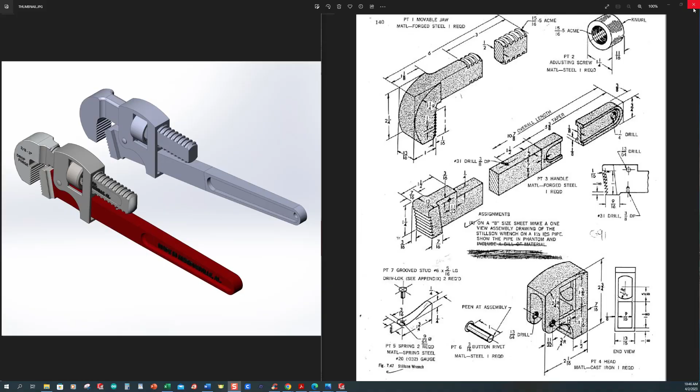So let's go ahead and get started with this, and make sure that we're in SolidWorks and in inch settings. I've created a separate little view here where we can see our dimensions pretty easily.

There's a few things we want to keep track of with this. We're looking at everything coming off of this front face, so we have an inch back to where the teeth are going to start. I'm not too concerned with the 1 1/8 right here as of yet. We've got 6 inches overall, 2 1/4 in the height, and 1 1/4 on the radius here.

And if you notice, this drawing is using fractional tolerances. So this is probably a 1950s or 60s model drawing that we've got out there. There may be some things done a little differently than what we'd do today, but we're going to work with it as best we can.

So let's make sure we've got SolidWorks open, and we're going to go ahead and create a new part. We'll verify that we're in inches—I look down here at the bottom right, and I am in inches. I want to start with an extruded boss base, and I want to start on the front plane.

So I'm going to draw a relatively simple line here—one here, down, over, down, and over. Now we're going to need an arc out here, so let's come up and grab a 3-point arc. Select the 3-point arc here and here, and something along those lines.

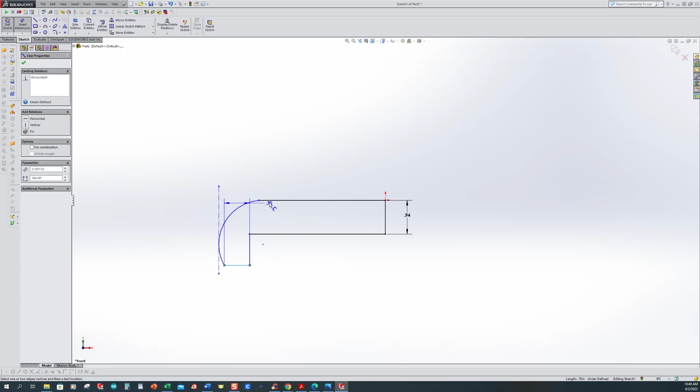So from here to here was 2.25. Now my radius, I should have added a relation there, so let's add a relation. We want to pick this arc and that line and that arc. Let's make those two tangent.

So now let's go ahead and continue with our dimensions from here to here. We want that to be 1. From here up, oh, I already have that one. And then we need an arc here, and that was 1.25.

And now we are missing something. Oh, the overall length. So smart dimension. So I want to pick from here to this line, and we want it to be 6. So now we're fully defined.

Now how wide was this part? So we want to come back to our drawing. It looks as if we are 13/16, or 0.8125. So let the computer do the math.

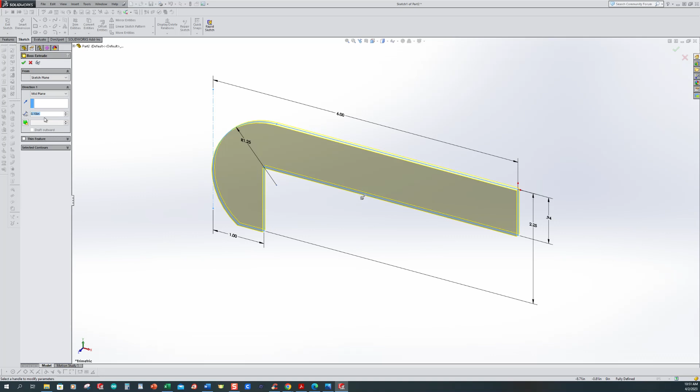So we should still be in the features of extruded boss base. If not, go ahead and select extruded boss base. Now this is where I want to use the mid-plane feature just to keep everything symmetric. Now this was going to be 13 divided by 16 is 0.8125, and go ahead and accept it.

Alright, so there's the beginnings of our jaw. Alright, so the next thing that I want to do, we can cut some teeth in it, and it looks like it's got a radius here, but I don't really know what that radius is.

We'll just add something in that looks visually representative, and we can also cut these out on the top. Let's go ahead and cut the top out, and we'll cut our threads in first. Alright, so let's select extrude cut, and I'm going to pick this very top surface. I'm going to pick a line from here down and over, and I don't know how wide this thing was.

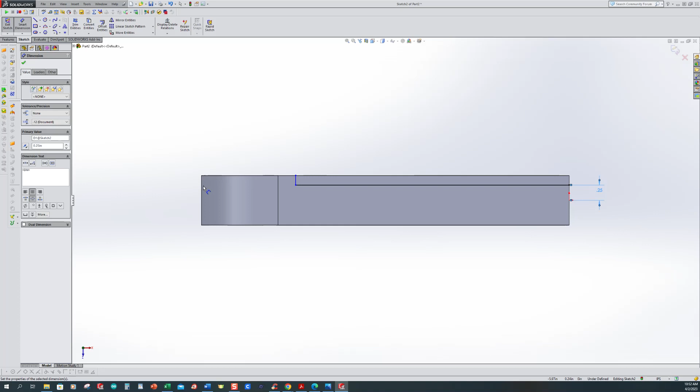It looks like this is a sectioned off view, so it says that we're 1/2 of an inch in width. So remember, we made our part symmetric, so we're going to come select a smart dimension, pick our origin, pick this line, and that's going to be 0.25, because 0.25 times 2 is going to be 1/2. There was also a dimension from here to here, and that was 1.125. Yep, 1 1/8, so 1.125.

And now we're fully defined. So select features. I wasn't sure if I selected extruded cut or not before. I want to say I want it to go through all, and I want to make sure that my arrow is pointing up to remove this portion of material, and I accept it. And we now have part of our cut here.

Alright, so the next thing I want to do is I want to mirror this cut to the other side. Now this is why it's really good to have your parts symmetrically made to begin with. So we selected the front plane. I'm going to come pick mirror, select mirror, and now I'm going to expand my tree out, and I want to select the cut. So we now have that as well.

Alright, so we have this kind of feature here. Now what I want to do is I have to create this round portion back here to where we can cut our threads on there. So let's select extruded cut. It's asking what face or plane.

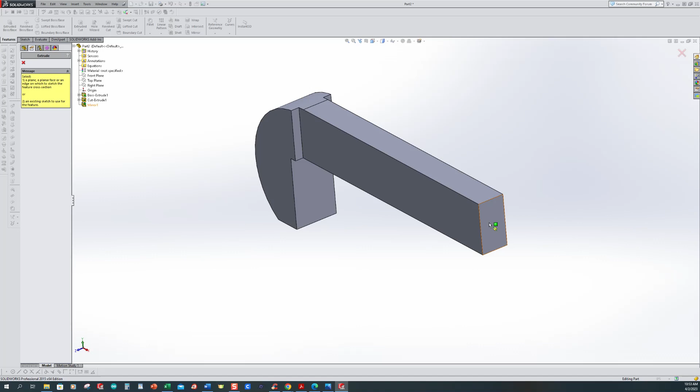I'm going to pick the very back part of my part. I am going to draw me a center line in the very middle of this and go from here to the midpoint, and that line should be fully defined. Hit the escape key, and it is.

Now I've got me a reference point out here that I can select a circle. Let's come up and pick the midpoint, pull this out, and we said that this was 15/16. 15 divided by 16, and we now have a circle here, so we can actually cut that radius down through here. Now this is where it gets a little bit tricky. So we select features and extrude cut, rotate it around where we see. This was going to be 3 inches in depth, 3 inches.

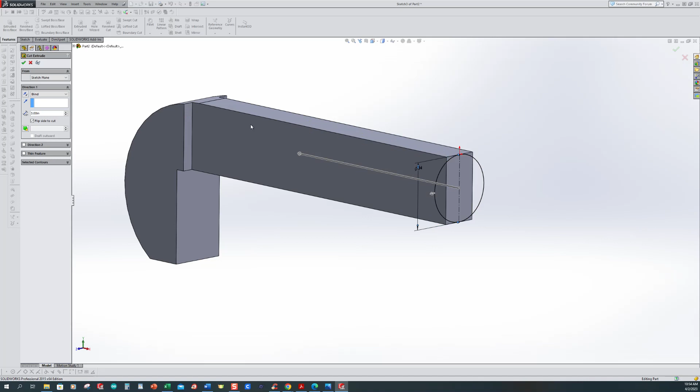So we're going to say 3. Now it's going to cut the circle out of the middle of that unless we use this flip side to cut command. So I select flip side to cut, and it should just leave that radius on the outside of it.

Another thing we want to do is create a chamfer back here, because we want a little bit of lead-in when we get ready to cut our threads. Come up to where your fillet command is, drop the chevron down, select chamfer. Let's make this maybe 0.125, 45 degrees is fine. I don't want to pick the entire face, but I want to pick this edge and this lower edge, then accept it. So now we have a chamfer here.

We need to put a circle out here so we can create a helix for our thread profile. Let's select the sketch command, pick the sketch tab, and select where we would like to place it. I want to place it on this very back face. I'll select another circle, circle by center, tickle one of these edges so the center point shows up, and it does. So I'm going to pull out here and place it.

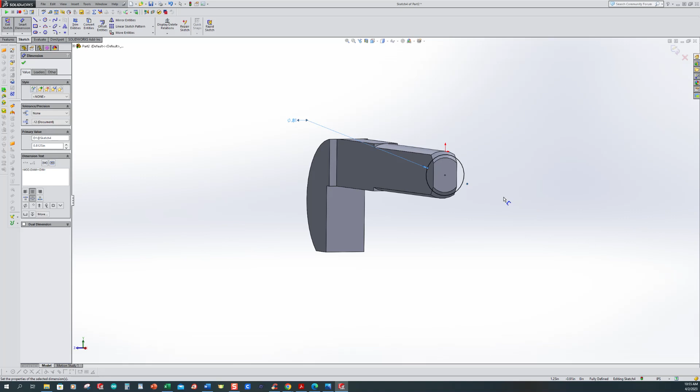The size of this, I believe, I want it to be on a tap drill of 13/16, or 0.8125. So we now have what our minor diameter of our threads is going to be -- that's 0.8125, or 13 divided by 16. I accept that, so we're fully defined.

Now I want to come up and use the drop down for the insert command, then use the curve, and select helix. On my helix I know there are 5 threads per inch, so I'm going to come up to where it says pitch and select 1 divided by 5, which should be 0.2.

For revolutions, if I go 15 it's going to be exactly 3, so I want 14.75 instead. I'm going the wrong direction, so I want to reverse the direction. Now notice it says my start angle is 180 degrees. I'd like to get that flipped up to a plane we already have existing, so I'll come over here and select this, and type in 90 -- so where my helix begins is 90 degrees from the origin it selected for me.

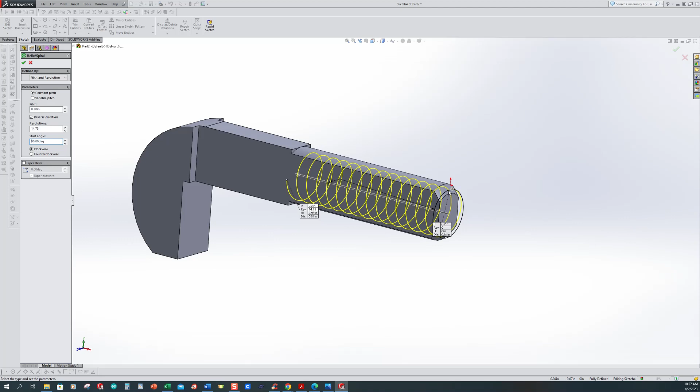This will allow me to come in here and draw a sketch. The other part is, I come out and look at where this part ends, and it doesn't end in the middle of a body section -- it's actually out here in the wide open. So I'm going to go ahead and accept the helix command.

So we now have a helix out here. We can adjust it because there's a sketch it swallowed up, so we can change the size of it. Remember, we started at 90 degrees instead of 180, so we now have a reference plane we can create a sketch on. I'll come over to where it says front plane, select it, the flyout comes up, and now I can select a sketch.

I want to zoom way in on this side, and I'm going to draw a shape that looks kind of like an Acme thread. Alright, so I've got that, but it's really kind of all out of shape.

So I'm going to put one more line here, going from midpoint to midpoint, and I want to pick that line and make it for construction, and also vertical. Okay, so I'm going to give this some dimensions.

So here on the bottom, let's make it 3 divided by 32, or 0.09375. Let's make it maybe 0.125 tall. And now we're going to need an angle in here -- let's just give it a 10-degree angle.

Alright, so we've got everything tied up geometrically, but what we don't have is a location for this thing. So let's select Add Relations. I want to pick this point from that center line that we drew earlier, so I select that point, I select our sketch, and I want to add a pierce point. And it moves that down along to where we can sweep this along this path. Okay, so let's accept it.

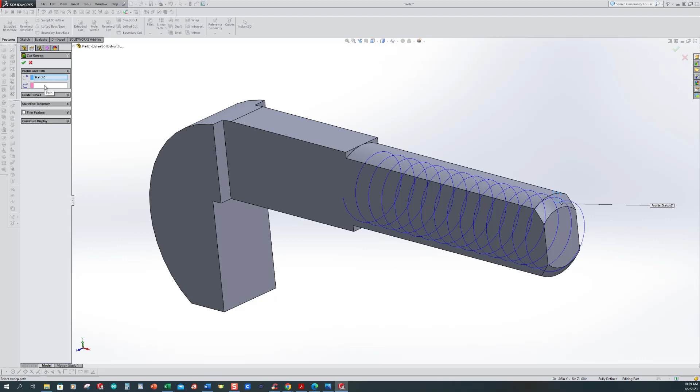Now we can exit our sketch, and we'll come up to the features command, move your tab over, and now we can use the swept cut command. So we select a swept cut. Now I have sketch 5 still selected because I didn't get out of it or anything. So the next thing I want to do is select the path that we want. I'll select that path, and it looks like it's going to remove the material that I'm looking for, so I'm going to go ahead and do that as well.

So now we have a kind of Acme thread on here. Now notice the reason why I didn't go 15 turns is because it was going to get into here and we were going to run into a problem with it cutting into that right there. So we terminated it just a little bit shy, using my Control 7 command.

This would be a good time to save this part after we've done something relatively complicated. So I'm going to come up here and create a new folder, and I'm going to call it the junk folder. Alright, and we said that this was part 1, so I'm going to call this mine J1.

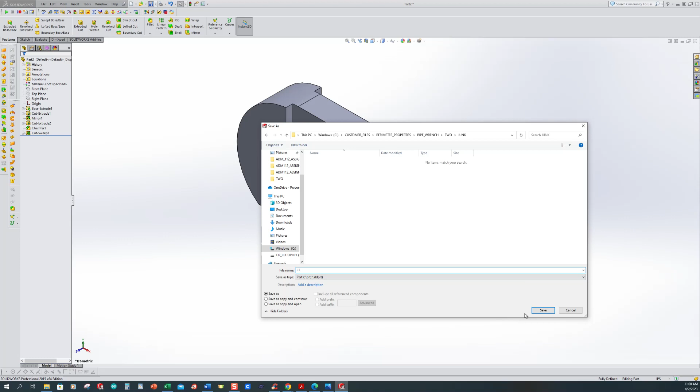And we're ready to move on with the next portion of this. So this has got to have some teeth down here on the end of it. Alright, so dimension wise, we're looking at this. We've got a 1/16 over and an 1/8 of an inch up, and probably 8. It looks like an inch tall, so we'll have to pattern it 7 more times, or 8 times.

Alright, so let's select extruded cut. We want to pick this face here, or the front plane, either one. And I want to draw a sketch down here along the bottom, and I'm going to start, say here, come up, want to come over and then up and over again. So just something that looks like a little Z.

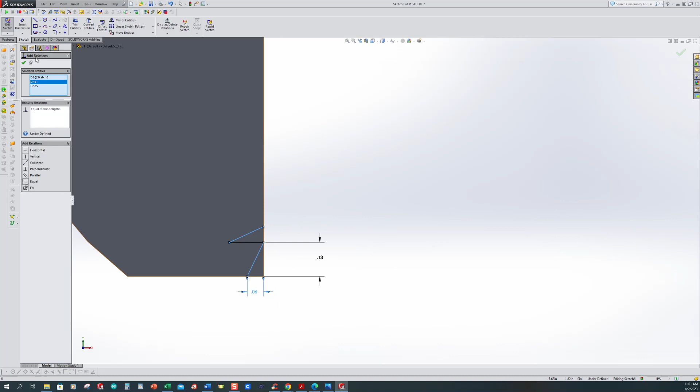Alright, so smart dimension, this vertical dimension was 0.125, and from here to this point was 0.06. And now this portion of it's fully defined. You can tell by it being black, and this portion is still blue. So let's go ahead and add a relation, and I want to make this line and this line equal. And then I want to give this a smart dimension from here to here of 0.125 as well. So we got that little shape here.

Now we're ready to cut this thing through. So features, extruded cut. My arrow is pointing where it's going to remove all of this - not what I want. I do want to say through all. And now this arrow, I can flip it here, or I can come over here and say flip side to cut. I want my arrow pointing here where it's going to remove those teeth. Now we're going to go ahead and accept that.

Alright, so we have a tooth here. Now let's come up here and select a linear pattern. I want to pick this edge, I want to make sure my arrow is pointing uphill. These are supposed to be 0.125. And the feature that I want is this cut extrude. Let's go ahead and take it as well.

Alright, let's make our pattern. I want to edit my pattern. Let's make our quantity 8. Alright, so we should be an inch tall now.

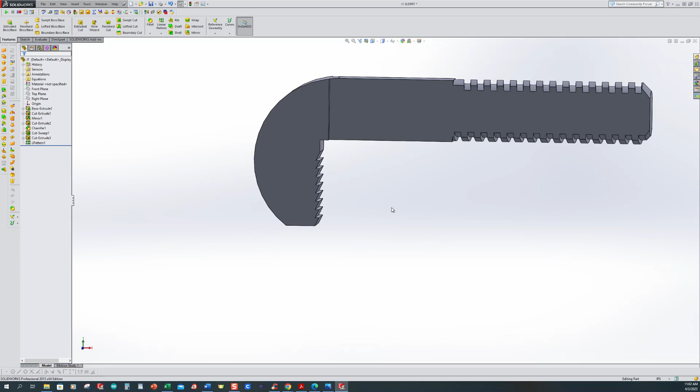Control 7. I want to take a look at our drawing and find out what we're missing. Alright, so we've just got some visual aspects, you know, maybe a fillet radius here and a fillet radius here and one here, just to kind of get this thing smoothed out.

Let's go ahead and add a couple of those. So select the fillet command. I'm going to make this maybe 0.125. I want to pick this face - I'm sorry, not face, but edge. Pick this edge, and I'm going to go ahead and accept that. And then I want to select another fillet again, so fillet. I want to pick this edge, and maybe down along the bottom as well. Alright, so that just kind of softens our part quite a bit.

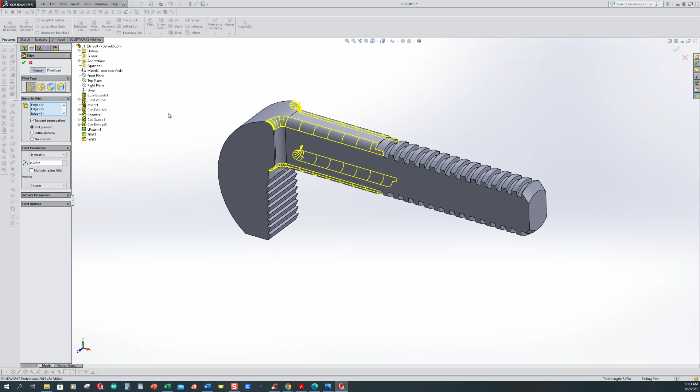Alright, so pretty happy with this particular part. Make sure that you got it named. Mine is named J1, and we're going to move on to the next part in our sequence.

So we're looking at a 15/16 internal acme thread. We've got 1.25 inches in diameter, and it looks like it's 11/16 in length. So let's go ahead and get started with this one.

So we want to create a new part. Select extruded boss base. I want to use the front plane. I'm going to go ahead and pick a circle here, and I want to pick a circle here.

Now remember, this is going to be an internal thread, so this is not going to be 15/16, but it's going to be the tap drill size, so it's going to be 13 divided by 16. And the outside diameter was 1.25. We can exit our sketch.

I would like for this to be mid-plane, and it said it was 11/16, so 11 divided by 16, or 0.6875, and we want to go ahead and accept that.

Now we're going to have a little bit of a lead-in here as well, so I want to pick a chamfer command. I want this to be maybe 0.125 -- let's make it just a little bit larger than that, let's make it 0.15.

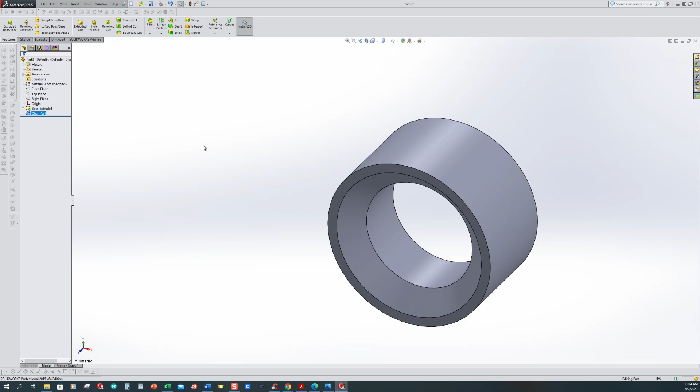Now I don't want to pick this edge and this edge, I'm just going to pick this face, and it's going to put one on both sides. So we now have this big chamfer in here, and we've got to cut some threads in the middle of it, so we want to create another sketch. I open up my sketch tab, select sketch, and pick this face.

I'm going to pick a circle, and I think I want it to be 15 divided by 16. So we now have some material still here. I go ahead and accept that.

And we want to insert a curve from curve again, so curve, helix. We're still 0.2, which our pitch is still the same. I don't really need 15 of them, let's make this maybe 6.

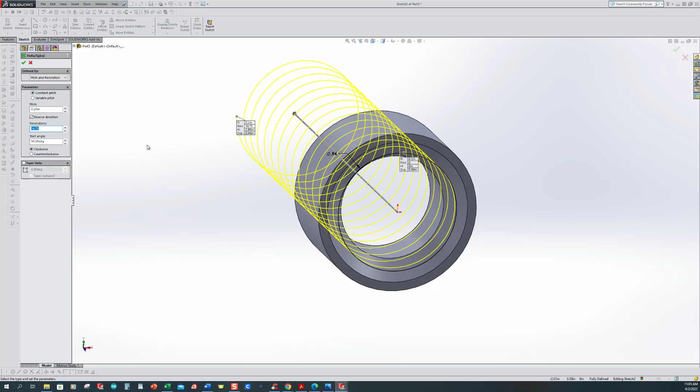We started at 90 again, so we know that we can use our plane. So let's go ahead and accept this, and we can exit this sketch.

Alright, so now we want to create another sketch. I'm going to select -- I'm actually going to use the right plane. So select the right plane, little flyout comes up, select sketch, and we have something like this.

Let's go ahead and draw our thread profile again. It's going to be a little bit backwards this time, so I'm going to pick here, here, here, here, and here, and now I want to draw another line from midpoint to midpoint.

I want it to be for construction, and I also am going to want it to be vertical. So I use my escape command, I select it, and I pick vertical.

Alright, the way we had this before, smart dimension, 3 divided by 32. This dimension maybe 0.125. And our degree angle between the two, or in between, is going to be 10.

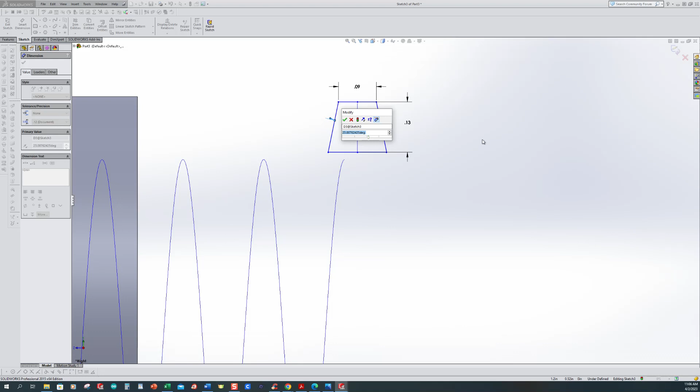And we want to add a relation, so I want to pick this, and I want to pierce that.

I don't really like that, let's delete that. Delete your pierce relation. What I want to do is add a pierce relation -- I want to pick this top point and our sketch, and I want to pierce it, because I was really controlling something wrong right here. So let's go ahead and accept that.

Taking a look at this -- am I going to cut it? I am going to cut something. So let's come up here to features. Oh, we got to exit our sketch first, so exit your sketch.

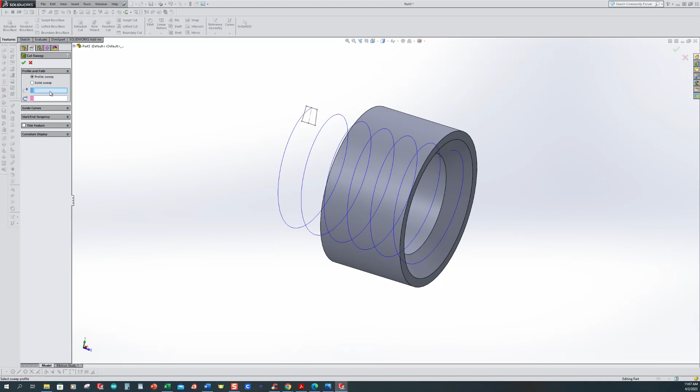We go to features, swept cut. The profile I want is that, the path that I want to take is our helix that we had earlier. We want to go ahead and accept it, and we now have this thread profile at the end of it.

So this is going to be our second part, and I'm going to call it -- I'm going to say save, and this is going to be J2. Mine is junk 2, name yours whatever you need to name it. So control S and save it, so we now have our thread profile in here.

Alright, so as we're looking at this, this is going to be our next part. This one is also pretty involved in creating it, you can't get too overwhelmed by that. We've got a taper down here, and our part is 10 7/8 long, so we've got a ways to go. So let's go ahead and create us a new part.

So new part, okay. We want to select extruded boss base on the front plane. I want to start on our point of origin, come out like this. I want to come up, over, and come out somewhere here.

I want a radius here, come down at an angle, come over, up, and over. Now, I think that's right.

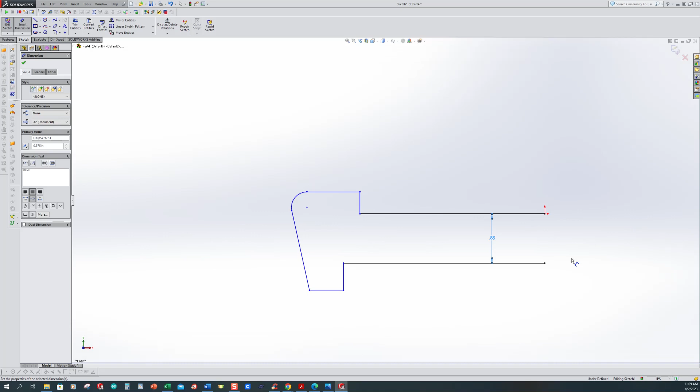So smart dimension, it said that this was 7/8, so 7 divided by 8, or 0.875. The distance between here and here was 0.25. So we got 0.25 here, 7/8 here, 10 7/8 overall from there to there, minus 5 3/8.

1 1/4 tall and 9/16. So down here, 9 divided by 16, or 0.5625.

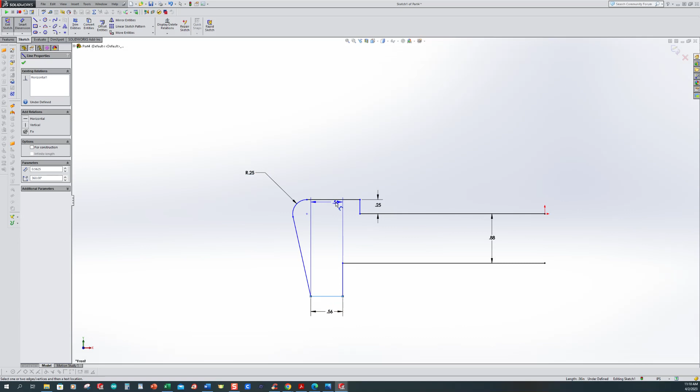Didn't see a radius here. I'm going to make this 0.25. Yeah, I don't see a radius, and it's 1 1/4 tall. So from here to here, 1.25. All right. So that gets most of this tied up, except we don't really have a length on here.

All right. I can come from here to this outermost point. Let's actually draw us some reference geometry out here as well, just to make it easy like we did last time. So I'm just going to draw us a vertical center line here.

I want to add a relation. I want to make this center line and this arc, I want to make those two tangent. And we could do some math here, but I'm really not interested in doing any math. We can make the computer do the math, but let's just go ahead and kind of keep things moving.

All right, so I want to pick a line command, come here. I want it to not be horizontal. Select here, come back in and tickle it, and then I can create another radius. I come around this way, click again, and I want to pull a line straight out along here.

All right. So now what I want to do is I want to make this line and this line equal. This arc and this line, I'm not sure it's tangent. I know that the other one is.

And now what I want to do is I want to make from, let's add another reference line back here just to kind of explain what's going on. So we pick a line here. And I want to add a relation between that line and this arc. I'd like to make it tangent.

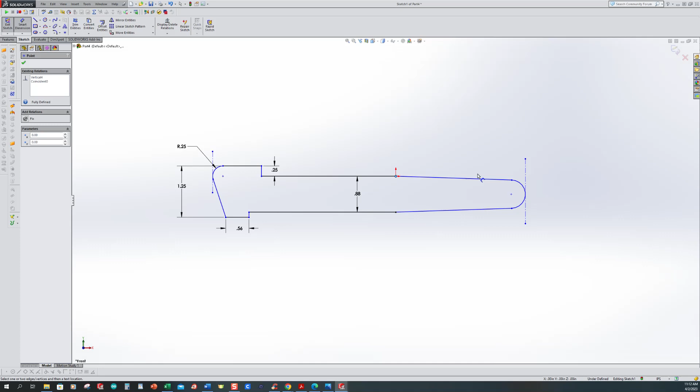Okay, so now we've got a distance here that we can really and truly call these things out. So the distance here I think was 5 3/8, and this height back here was 3/4 of an inch, but we got a radius back here, so we got to cut that in half. All right, so smart dimension from here to here was 5 3/8, so 5.375. This distance was 0.375. So that gives us that taper.

So that was the only two things that we really needed. Now the overall length of our part, I think, was 10 7/8. So we want to come back to our dimensions. We want to pick here, here, and that was going to be 10.875.

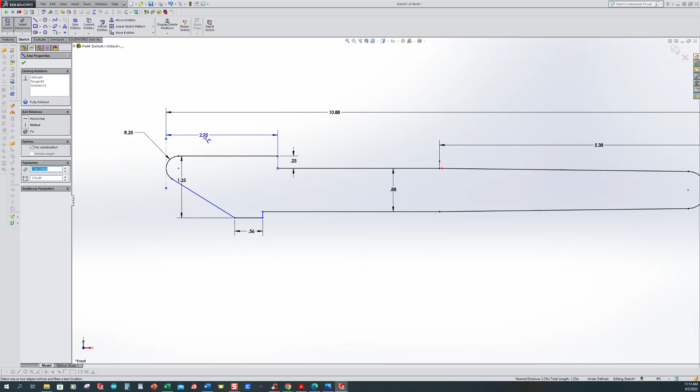I don't have an angle here, so I got to figure out what we got going on there. 7/16 along the top. No, that's not right. 1 1/2. So we go from here to here, and that was 1.5.

So I want this to look a little something like that, but what have I got? What am I missing here? Oh, 3/16 from this edge to that corner right there. All right. So smart dimension from here to this point, 3/16 or 0.1875.

We are now fully defined. The only thing we don't have defined is the endpoints of these reference lines. So I'm not real concerned about that.

All right, so the thickness of this part, I think it was also 13/16, and I'm looking down through here. So yeah, right here tells us that we're 13/16 wide. So let's go ahead and extrude this out. So features, extrude. Let's go mid plane. I'm going to say 13 divided by 16 is going to be 0.8125, and now we want to go ahead and accept it.

Alright, so the next thing that we want to do, looks like we've got a cut here, 7/16, and our thickness of our part is going to be 1/2 of an inch wide. Let's go ahead and make that cut, and then we'll come back in and create our taper back here on the back, because it tapers down from our 1/2 inch to 3/8 at the very back.

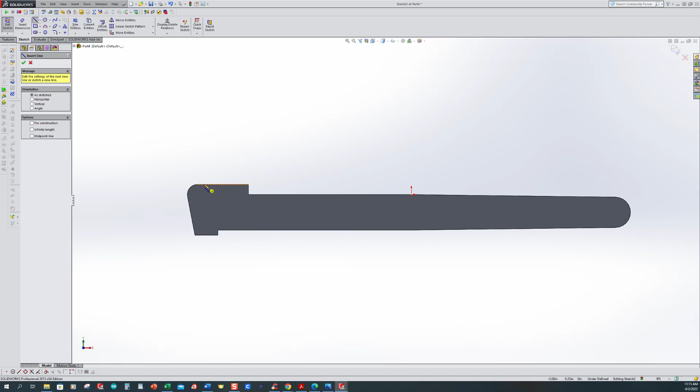Alright, so extruded cut, I'm going to pick this face here. I'm just going to draw something like this, and then I'm going to draw something like this, even though I should have made that horizontal. Let's click on this line, make sure that you're horizontal.

Now we want to add a couple relations, so add relations. I want this line and this back arc, I want those to be tangent. I want this line and this leading edge, I want those to be parallel. And now I want to use a smart dimension from this point to this point.

It says that it was 7/16 or 0.4375. And now we can create our cut. So our cut was, our thickness, overall thickness of this portion of it was 7/16.

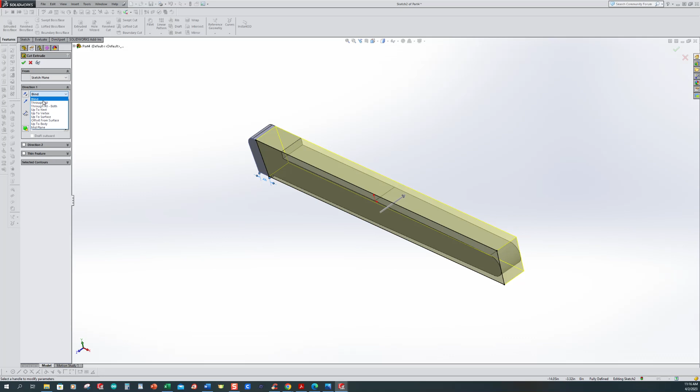So let's go ahead and make our cut. Extruded cut. I want to cut offset from a surface, and my surface that I want to select is going to be the front plane, and I want that to be 0.25 because I want it to be 1/2 inch total width when we're done.

So I accept that. Alright, so now we got the beginnings of this. We want to mirror that command over to the other side. So I'm going to select my front plane, select my mirror command. It's asking what feature that I want. I want the cut, and we have that.

Now the next thing that we've got is a taper that's back here. So let's go ahead and create that taper. Alright, so let's select the top plane. Flyout opens up, select sketch. I want to come up and pick a line command. I want to pick here, come out here to this back edge, select it, come down, select that. I want to come all the way back to where these two, that change happens.

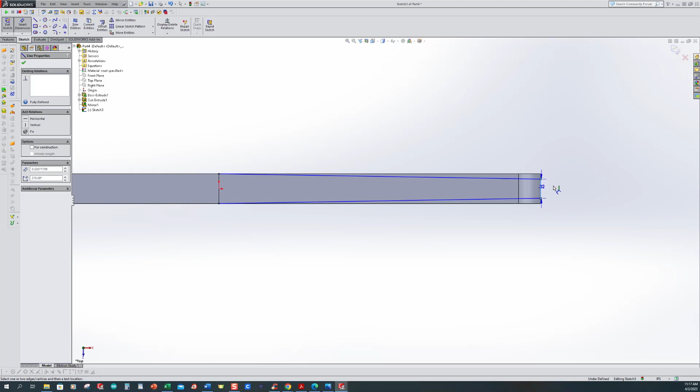So let's make some relations. So we want to say add relations. This line is already selected. I picked this line. We want to make those two equal. Now I think I can do this with one dimension, so we select smart dimension. We know that we said the width was 0.375. Alright, so we're 0.375. We come down here, we are fully defined, and we want to create a cut.

So select features, extruded cut. We want to say through all both. Make sure that your arrow is pointing out, and it is, and we accept that. Alright, so we now have our tapered portion of our handle.

Alright, so we have a hole here, and I think I'm going to put this hole in the bottom. I don't think I want to put this hole in the top, and then we've got to create an indentation back here and a hole back here in the back. So let's go ahead and select, we'll create this hole here. So we got 11/32 over from this edge. It's 3/16, and it's also 1/4 inch down.

Alright. So select extruded cut. I want to pick the front plane again. I want to pick a circle. Place a circle in this general area. I think we said it was 13/64, so 13 divided by 64.

Now we've got a dimension from here to the center of our circle of 11/32. 11 divided by 32 is 0.343. Now let's add a relation. Let's just call it by dimension. So we come over here, we place it down, and it's 0.25. So that hole is ready to be cut.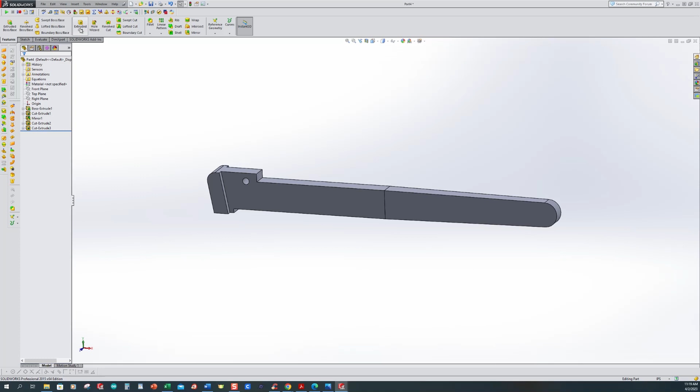So let's do the same thing. We've got a hole back here in the back of this where we can hang our tool up when we're done. So let's select extruded cut again. What face or plane? I'm going to expand my tree out. I want to select the front plane. I come up and select the circle by center again.

I'm going to come tickle this back edge. My center point shows up. I place it here. I have to find what size this thing is. That hole is 1/4 inch, so we're going to smart dimension, place it here, and it's going to be 0.25.

Alright, so we want to features, extruded cut, and we want it to be through all both as well. I still didn't select through all both. Again, edit, through all both. Alright, so now we have that.

The next thing that I like to do is I like to put this spring retaining hole in the bottom of this. I'll look over here and it looks like we've got a number 31 drill, and the depth of that is going to be 0.38. So let's come down here and we want to use the hole wizard.

We want a simple hole. We want to verify that it is a number 31. You can show your decimal values, which is 0.12. And now it's going to ask us where we would like to place this hole.

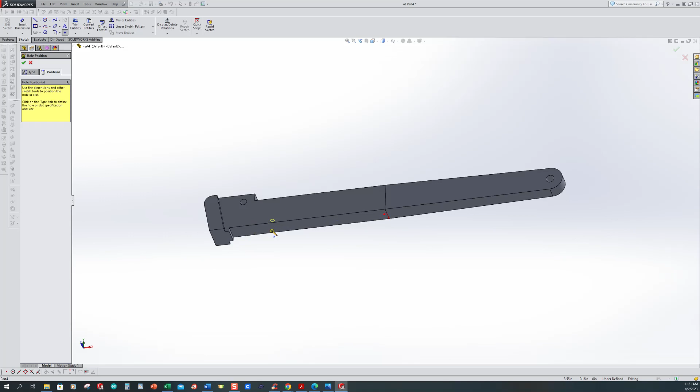I'm going to select positions. So what face do you want to put it on? I want to put it right here. Use my Control-8 command and make it normal to us. Flip mine backwards, but that's fine. I'll place it here.

Now I want to add a relation, because we know that it's centered up. So that point and that point, let's make those two horizontal from one another. And then there was a dimension somewhere in here.

Oh, I know what we can do that's different. We're going to take our view and we're going to show it with the wireframe with our hidden lines in here. Alright, so now I'm going to rotate this thing around, and we got a dimension up here somewhere.

So we'll come over here, and it looks like that is in line with our other hole. So that's 11/32 from there. So I want to pick Smart Dimension.

I'm using my Control-8 command to get everything back in alignment. I want to pick this edge and this, and I want it to be 11/32. And we've now put it centered up with that hole.

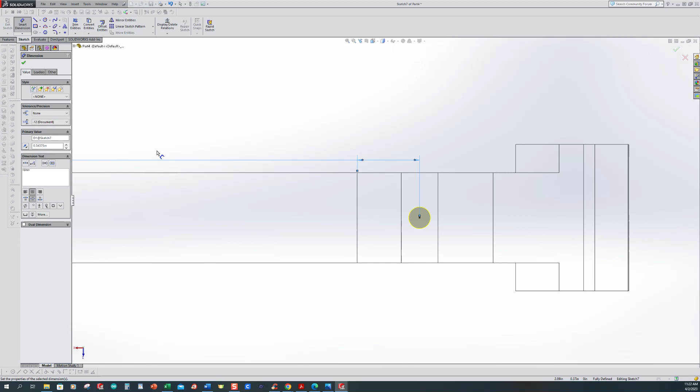So I accept it. Now our type, let's go back to our type for just a moment. So blind, we want to make sure that our end condition is blind, and we also want to make sure that it's 3/8 or 0.375 in depth. Don't want a near side countersink.

Should give you your preview of what's going to go on here. So let's go ahead and accept that. And we now have a hole in here for our retaining pin.

We also want to change back to shaded with edges. I'm going to use the Control-7 command, and now the next thing that we got to do is we got to put some teeth along the front of this thing.

So come up here, we want to select, we're going to create an extruded cut, and then we're going to create another pattern. We also have to create an indentation here as well, it looks like. So we're pretty close to our second part.

We're pretty deep into this at 40 minutes long. It seems like it's taking a little bit of time. So these things actually do take quite a bit of time.

So let's select extruded cut. I'm going to pick this face here, or you can pick the front plane, either one. And same thing as what we've done before.

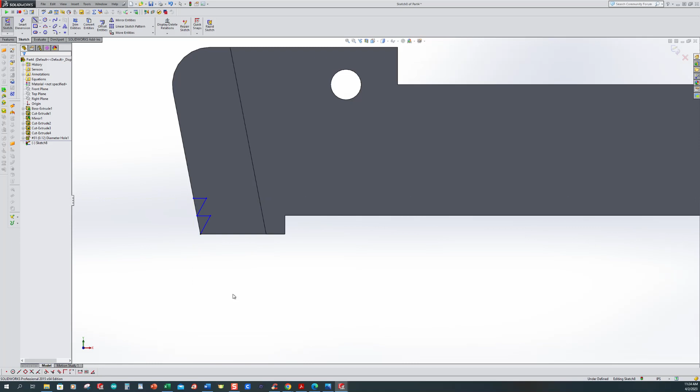I'm going to come over here, pick a regular line, start at this bottom vertex, come over like this, up, over, and up. So one extra line in here. Alright, so I've used my escape command to get us out of this.

So let's add a relation. I want to pick my horizontal line and my horizontal line, and I want to make those two equal. Now, the next thing I want to do is I'll select something completely independent of those. I pick this angle line and this angle line, and I want to make those two equal as well.

So we should be able to do this with 2 dimensions. So Smart Dimension, I'm going to pick my angle line, pull it out, make sure it pulls out horizontal, and that's going to be 0.125. And I'll pick this line here, and that's going to be 0.0625.

Alright, so there's our beginning of our teeth. We want to go ahead and features and extruded cut, and let's select through all both or through all. Make sure that your arrow is going to take the material off that you want. You may have to flip it, so let's go ahead and accept it, and we now have some teeth here.

Now we want to do select a linear pattern again. We want to go along this line. You don't want to pick a vertical line or anything, so we want to pick here, arrows pointing this direction.

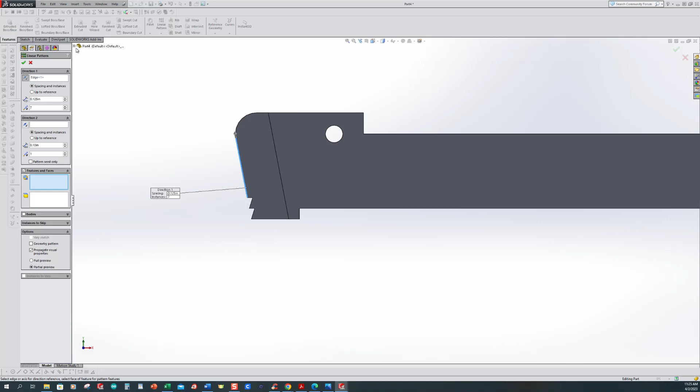Size is going to be 0.125. I've got 7 here, I can't remember if we need a 7 or 8. So the features that we want, I could pick it over here, but I like picking it out of the manager tree, so I'll select the cut. 7 looks like it's going to be good. And now we've got all of our teeth, so Control 7.

And now we need to put this indentation in here in the back. Alright, so we want to create another extruded cut. I don't want to pick this face here. What I do want to pick is this face, because I want a thickness across the back of this. I think it's 1/8 of an inch. It is 1/8 of an inch.

Alright, so we're in this part. Let's go ahead and save this. I think, what part was this? This is part 3. Alright, so we're pretty deep into this. Kind of broke one of my rules, not saving it. So this is going to be J3. Alright, so we accept it.

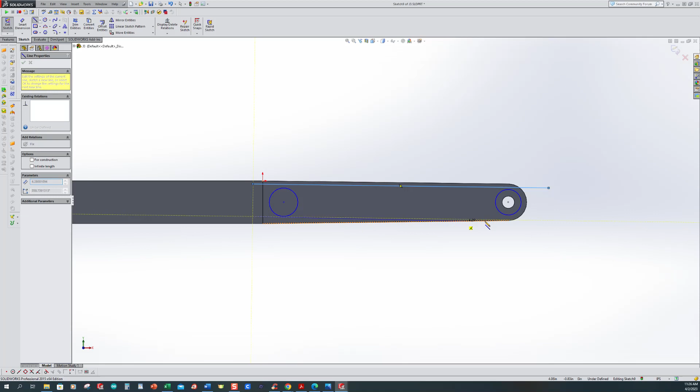And now what I want to do is I want to create an extruded cut. I want to pick this face. I want to come select a circle. I'm going to tickle this area here. I want to place another circle out here. And now I want to draw 2 lines. Just make sure that they don't snap horizontal, or just let them not snap anywhere in particular.

So now, use my escape command. I want to add a couple relations. So this one is centered up on this, so we can't really move it. But what I want to do is I want to pick the center of my circle and the center of my circle, and I want those two to be horizontal. Now, with that being said, I want to pick this line and this arc. I want it to be tangent.

Next, I want to move to this line, this arc, tangent. This arc, this line, tangent. This line, this arc, tangent. Okay, so now let's trim some stuff off. So come up to trim. I like to use the trim closest to command, so I can just pick this, this, this, this, this, and this. So I've got this slot looking shape.

Okay, so we're ready to start dimensioning. So Smart Dimension, I want to pick this edge, hold my shift key down, pick this circle, and I want it... Smart Dimension, let's try this again. I want to pick this edge, hold the shift key down, pick this circle. And I want it to be 0.125. Alright, I want this to also be 0.125.

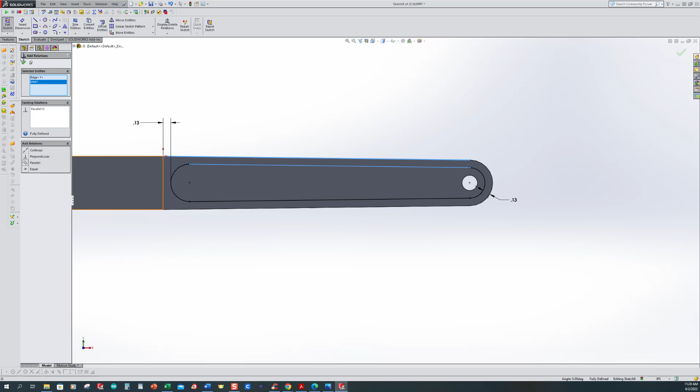Now, I did fail to add a relation. I want this arc and this line to be, this and this to be parallel. And that should be all the dimensions that we're going to need and all the relations. So I failed to add a parallel relation between these two.

So now we have this shape that we're going to cut some relief out of our handles. So we'll come up here to Features, Extruded Cut. Now this one goes in, it doesn't go into that face, it actually goes into a certain web thickness in here. So we want to go offset from a surface, and that surface, we're going to expand this out, and I want it to be the front plane. I want it to be 0.125, and then I accept it.

So now we're ready to mirror that across the other side. So we select Mirror. I'm going to use my front plane, and the feature is the last cut that we had, and we accept it as well.

Now we come in here and start adding some fillets, but I'm not real concerned about those at the moment because it's going to make this pretty long. So we want to make sure that we save our part and we move on to the next one. Alright, so as I'm looking at this, we've got part 1 done, we have part 2 complete, we have part 3 complete, and now let's move on to part 4.

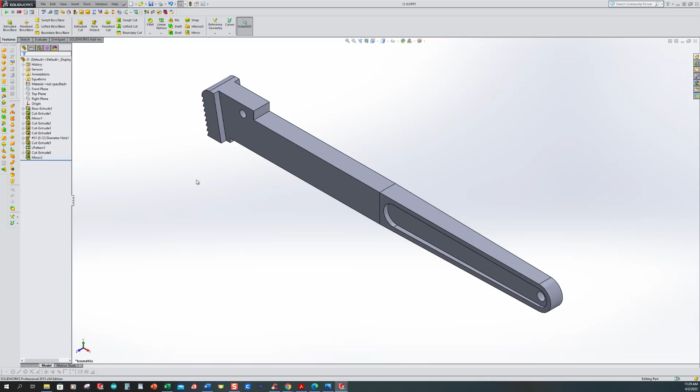Alright, so we come over here to SolidWorks and we're going to make sure that we create a new part. We're going to create an extruded boss base on this front plane. As I'm looking at this, we're going to go 1/2 inch across the bottom, we're 2 3/4 up to the top of this 2 1/4 inch radius.

We're 2 1/16 overall in the width. Come down 11/32 to the center of this radius. We have 3/4 of an inch here. Alright, let's get started.

So pick a line. I'm going to come here, here, up, and now I need another line here, just something like that.

Now I want to add a relation. So I've got nothing but the straight lines. I want to pick this and this, and make those two horizontal from one another. Smart dimension, pick this, let's give this some size, and that was 0.5. Okay, so that's going to get everything kind of oriented size-wise.

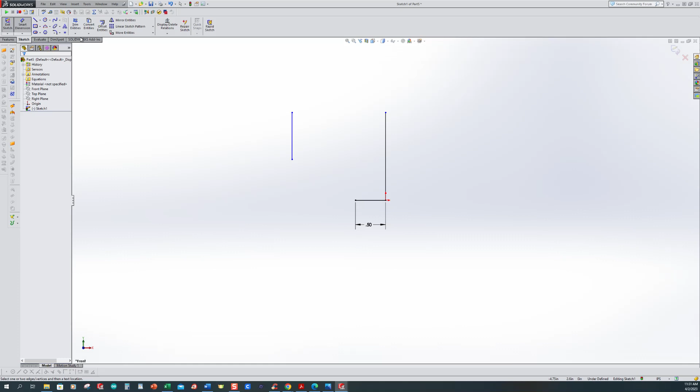Now let's come up and select a 3-point arc. I want to pick here, here, and then place it. So that dimension was 2 1/4. So smart dimension, 2.25, and then we had an overall height of this part of 2 3/4.

So we come here, hold your shift key down, pick this arc, pull it out, place it, 2.75. Okay, and now we have a width of 2 1/16. So we're going to pick here, here, 2.0625. Okay, so now it looks like I've got an arc here.

3-point arc, got one here, and then I've got one from here to here.

I want to add a relation. I want that arc and this to be tangent, and this line and this arc to be tangent as well.

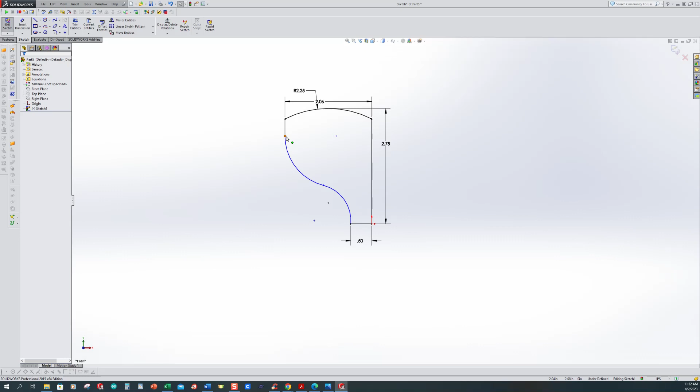I don't know what that right there is. I'm just going to drag things around just to kind of get things shaped up. Okay, so looks like we're 3/4 of an inch here, and looks like we're 11/32 in

to the center of that hole. Okay.

So another thing I want is this center point. So let's add a relation. This center point of this arc here and this point here, let's make those two horizontal from one another. Now we can add a smart dimension, this, and that's 0.75 because it said it was 3/4, and then the distance from here to here was 11/32, so 11 divided by 32, and that's that shape there.

Does it look right? Kind of looks right. I'm assuming it looks right. Alright, so we got that shape here. So let's exit our sketch.

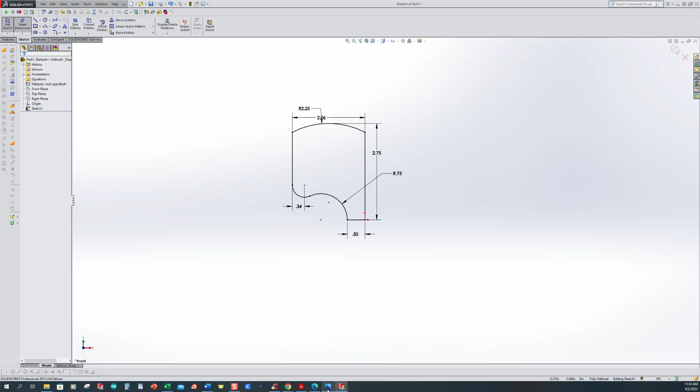We should be in extrusion. The width of this is going to be 13/16. It doesn't make any sense. Sure.

So we come back up here to this. We want to be mid-plane. 13 divided by 16, and we're good there. So now the next thing that we want to do is let's cut this in the back.

Alright, so we got 9/16, well, we got an 1/8 inch on both sides, which would end up being 9/16, and an 1/8 inch from the height, 1 1/8 radius of a half. That's clearance. Okay. All right. So we got 1/8 inch, 1/8 inch, 1 1/8. All right.

So extruded cut. I want to pick this very back face. I'm going to come up and select a rectangle. I'm going to place it here. I want a smart dimension from here to here of 0.125.

I'm going to do the same thing on this side because I really want this symmetric. 0.125, and this from here to the bottom, it was also 0.125. What was our height of that? 1 1/8, so that is going to be

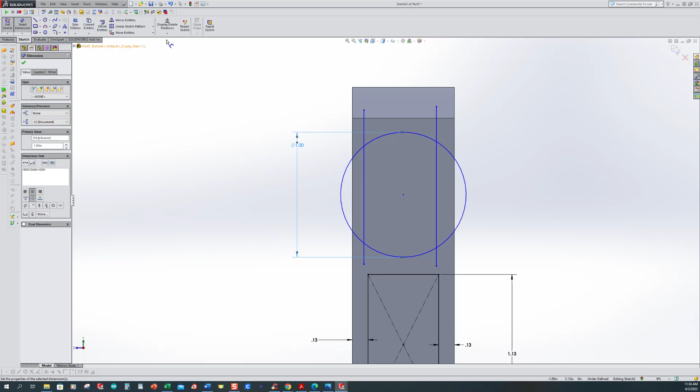Let's add another relation. I want to make this line and this line collinear, and this line collinear. And now let's trim some stuff off. Trim here, here, here, here, here, and here.

It still looks a little out of skew, so let's add another relation. Let's go back to these lines now that we've cut some things away. Pick those two, we want to make those two equal. Okay, so that should square some of that up.

And now we need a distance between those two. So the distance to the center of that is going to be 5/8. So smart dimension from here to the center point, that's 0.625. And so that's the back side of that.

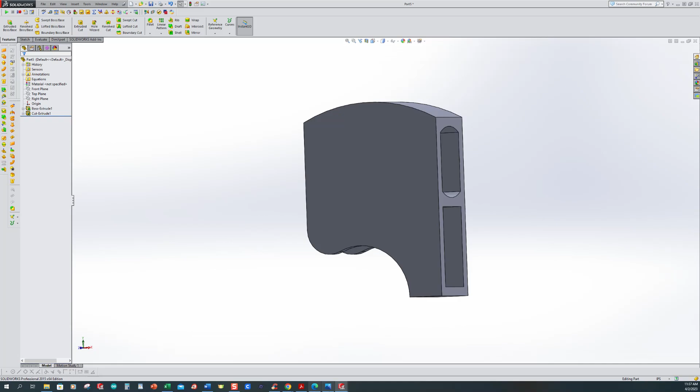So we want to go features, extruded cut, and we want it to be through all. So go ahead and accept it. So we now have the beginnings of that. Alright, so we got to cut a hole in here.

So we got 1 3/8, 13/16, and it looks like it's 7/16 over. Alright, so we want to select extruded cut. We'll pick this face. Looks like it's just a simple rectangle.

So we pick here. I think it said it was 13 divided by 16. From this edge to here was 7/16, or 0.4375. There's a height of this thing. No clue what it is. 1 3/8.

And then 13/16 up from the bottom. So this is 1.375, and from here to here, that doesn't look right. 1 3/16.

1.1875, that looks a little better. All right, so come up to your features command, extruded cut. Make sure you cut it through all.

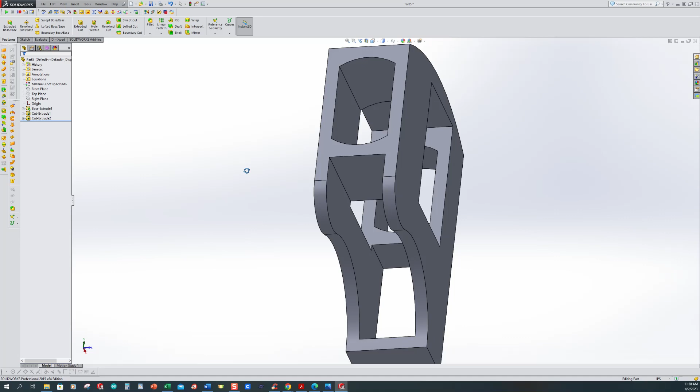So we have that, now we got this face here. Let's see if we can get rid of that, because as I'm looking at my drawing, it really doesn't show anything there, but this is open right in here. We wouldn't be able to rotate our jaw, this movable handle itself wouldn't be able to rotate up and down in there.

So let's work on this, try a different command. Let's say insert, features, insert face, and delete. I think we want to be on delete and patch. So I want to pick this face, make sure that you show in your preview so it looks like it's going to get rid of that. Go ahead and accept it. So now we got that piece that's gone.

Looks like we got another hole that we have to cut in here. So we got a retaining pin hole, 11/32 over, it's centered up into that. We've already determined the 11/32, so we got 13/64 that we need to put in here.

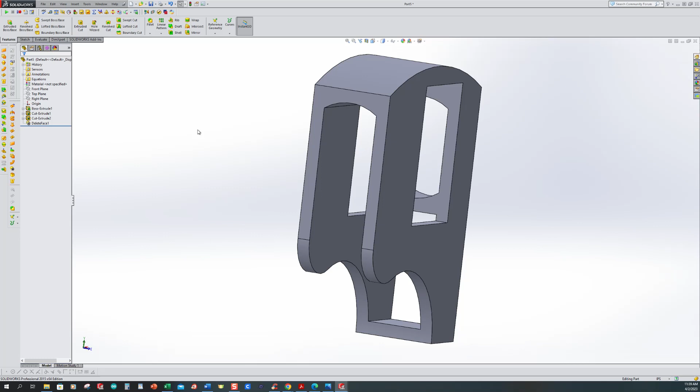All right, extruded cut. I want to pick this face here. I want to use a circle by center command. I come and tickle this radius, pick this, pull it out. Smart dimension, it was 13 divided by 64. And we want to exit our sketch, and our cut, we want it to be through all, and accept it.

So I think we are now done with actually part 4. So this is part 4. I think we have everything on there. If not, we can always go back and make some adjustments.

So the next 2 are extremely easy. Our next 3 are somewhat easy. We got a couple pins, and we got this piece of spring steel. This piece of spring steel, we're going to make a configuration out of it so we can create some assembly work.

So this is going to be called number 4, so mine is going to be J4. So Control 7, Control S for save. This is going to be J4. Accept it, and now let's move on to our new piece. So we'll say new part and OK.

And we want, so this is 4, so 5 is going to be our piece of spring steel. This is a little bit confusing, but we're going to add a configuration. Okay, so we got 1 3/4 and a 1/4 inch height, and it looks like it's 3/8 wide. All right, so we want to select extruded boss base. We want the front plane.

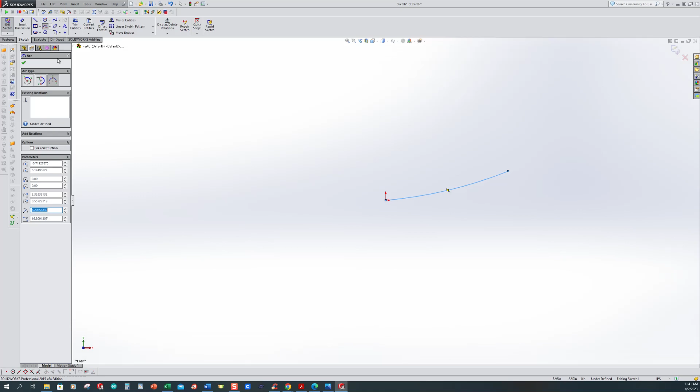I'm going to pick a 3-point arc. I'm going to start here, pull it out here, and I want it to look just a little like that. So smart dimension, from this point to this point is 1.75, and from this point to this point was 0.25.

Now I want to draw me a reference line right here, so I want to pick a line and just pull it here. So what I want to do is I want to make this tangent with that line, with that reference line. Add a relation. I want to pick my arc, I want to pick my center line, I want to make it tangent. That should completely define it.

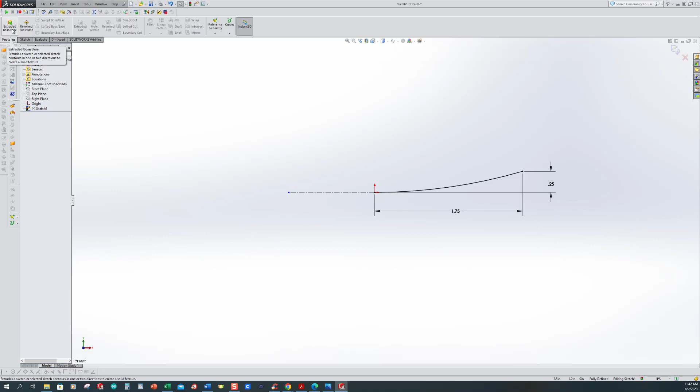So it's figured out where our 3 points are to determine this radius, because before I could just rotate this thing up or down. So let's go features, extrude, and this is going to be mid plane. It's going to be 0.375 wide. It said that it was a number 20 or 0.032 on thickness. So our thickness is 0.032, and we'll just go one side on that, and we're going to call that good. Okay, so now this is the height of our spring.

So what I want to do is, no, let's not do that just yet. So let's create an extruded cut. I want it to be on the top plane. I want a line coming from this outer corner right here, down. I want to come back in here, and I want to create this radius. And then I want another line all the way to this corner.

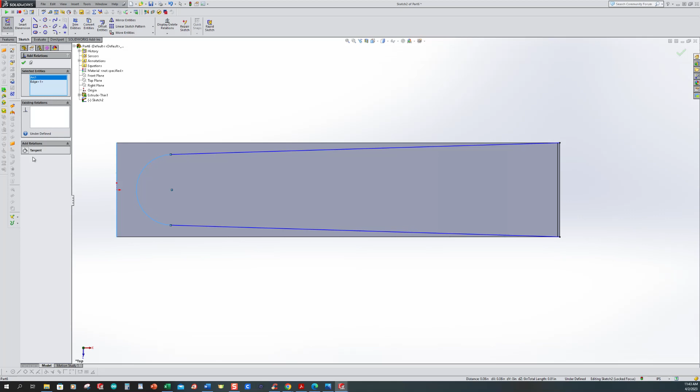Okay, so let's add some relations. This and this, I want those to be tangent. Our origin and the center point of our arc, I want it to be horizontal. This edge, this arc, tangent. And now it looks like it's a 1/4 inch at the very end on the width.

I really did this wrong. Display and delete relations. So I want to pick this, I want to delete that coincident, and I want to delete this coincident. Okay, so I should be able to move these.

So now I want to drag this down to here, okay? Make sure that this one is also coincident here. Alright, so smart dimension, here and here, 0.25. So I had this a little bit backwards, so sorry about that.

You could redraw this and kind of get that shape on there instead of deleting those. So now we want to create an extruded cut. I want it to be through all both. I want to make sure that I'm not cutting this, so I'm going to have to flip the side of mine and then accept it. Okay, so now we got something that looks a little bit like this.

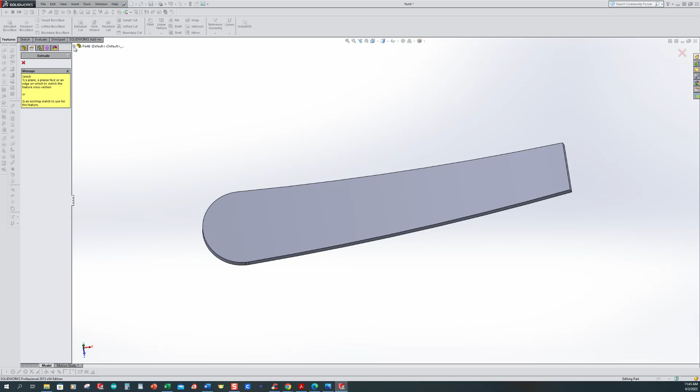So the next thing that we want to do is an extruded cut, and I want it to be on the top plane again. I want to pick a circle, hover over the tickly edge of that, place a circle here. That circle is going to be 9/64 in diameter. So smart dimension, 9 divided by 64. And now we can select features, extruded cut, and let's make sure we go through all both again and accept it. So we now have a hole here.

So this is our piece of spring steel. Alright, now what I want to do is when we get ready to assemble this, I want to use this where we can kind of put it in different orientations. So I'm going to come up and select configurations. I want to go and I want to add a configuration, and I'm going to call this assembly and accept it. So now we're no longer in the default, we are in the assembly configuration.

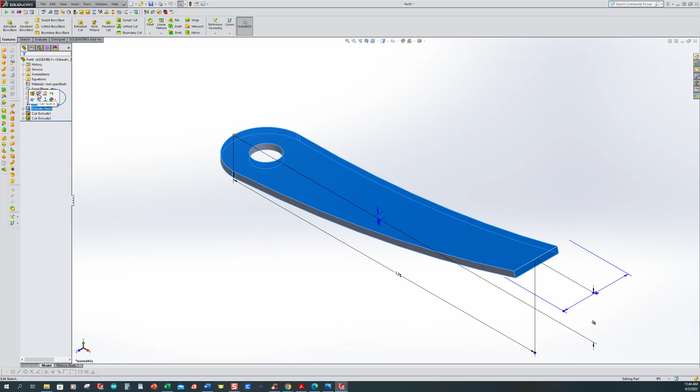I want to come back to my feature, my first extrusion. I want to edit that sketch. Now this dimension here is the one that I want to change. So I double click on it. Now notice I now have this little drop down beside it. I don't want it to be all configurations, I want it to be for this configuration. And now let's change this to say 0.1.

Alright, so it's moved that. Verify that everything is still functioning. So now we're in the assembly. Let's go back to default and see how the two move around. So when we get ready to create our assembly, that's what we're looking for.

I'm going to leave mine in assembly because we're going to make that different. So Control 7, Control S, and I think this was part 5, so I'm going to go J5 and move forward. Alright, so the next thing, these are our two easy ones.

So we have a little small pin. It looks like it's 5/16 long. It's a number 6, which I think is 130, and then we got a 3/16 buffer, so it's 3/16. Alright, so let's worry about number 7. So the number 6 by 5/16.

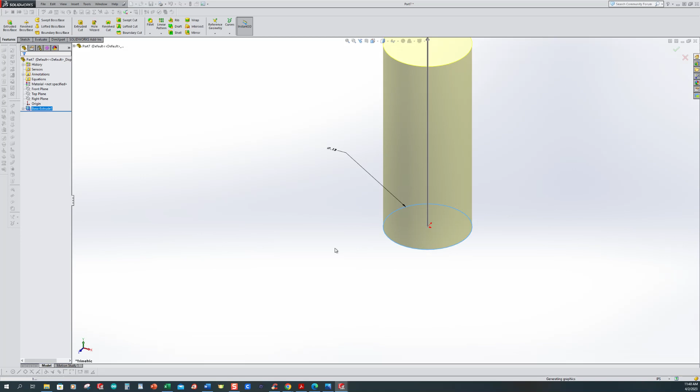So we say new, part, OK, extruded boss base, top plane. We want a circle, pull it out here. That's going to be 0.13. We want to exit our sketch. We extrude it 5 divided by 16. Accept it. Now we want to create a little top on this thing, so we want to select extruded boss base.

We want to pick this top surface. I want to come select a circle here, place it like this. Smart dimension, I think this is going to be 0.201. Sure. Exit our sketch, our extrusion, let's make it 0.01. So we now have something that looks like this. Wow, that's a big extrusion.

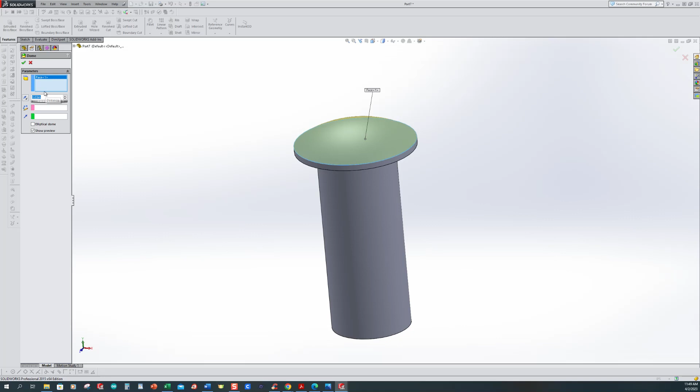Okay, 0.01. Alright, so let's add a new command that we haven't done before. So we're going to say insert, features, dome, pick this top surface. 0.1 is entirely too big. Let's make it 0.03, and we just now have a small little dome on the top of this thing. Okay, so Control 7, save this.

I think it was part 6 for say junk. Mine is J6. Now the next one was virtually the same thing. It's going to be a 3/16 by 1 button head rivet. So new, part, OK. Extrusion here, on the top plane, we want to pick a circle, place it here, 3/16 or 0.1875, fully defined, exit our sketch. It was 1 inch long.

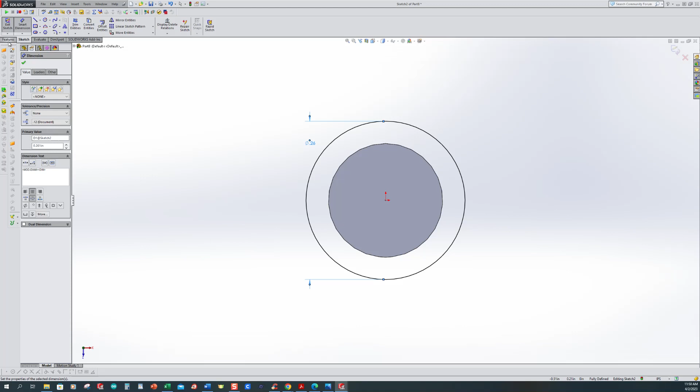Accept it. We want to create another extrusion on the very top of this, so extruded boss base, pick your top surface, come select a circle, pick here, and I think this was 0.261. Exit your sketch, make the thickness 0.01, accept it. So you look kind of similar.

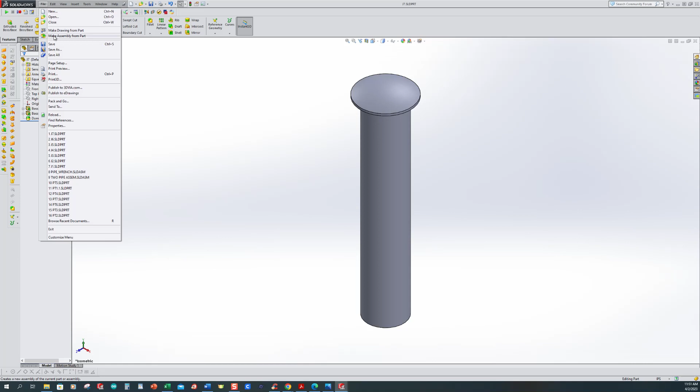Now I think J4 was the one that I'm going to select, graphics preview. So when I drag this over here, I don't want to just place it out on my very first part. I want my first part to be fixed and everything else move around that. So I'm going to use my green check command and place J4 where I modeled it.

Alright, so now I need to insert a component. J1 was the movable jaw, I'm just going to place it here. Okay, so now I'm ready to start mating this thing. I can move this one anywhere I want to, but I can't really move this one. It says the component's fixed.

So let's come up to our mate command. We want to select a concentric mate. Now I'm going to pick one of these outside portions of our threads, and I'm going to pick the round portion of our jaw. So that gets this to where we can move it in here. It's going to stay centered up, but the problem is it'll rotate around. Okay, so that's one mate that we have. It shows that we have a concentric mate in here.

So the next thing I want to do is expand my tree out. Now notice I have these parts and these planes here. I don't really want to use my assembly planes because it may become problematic later. So this is going to be centered up with this particular part. J1 and J4 are related to one another. Those are the two that I want to keep oriented to each other.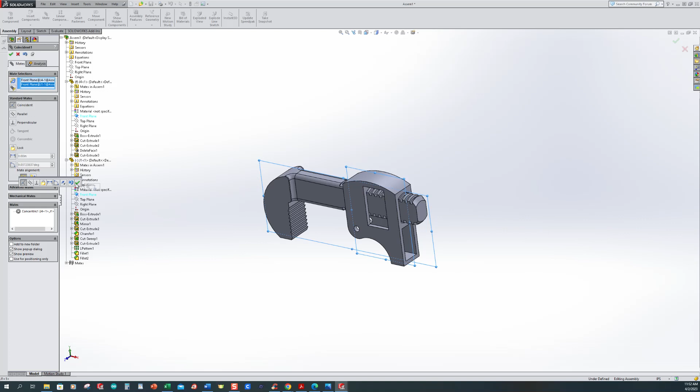So I'm going to come down here and expand this out. I want to select the front plane of J4. Now I want to expand J1 out, and I want the front plane on it as well. Notice it rotates that around. Alright, I'm going to accept it. I now have two mates. I could apply a distance mate in here, but we'll worry about that. Let's go ahead and do that.

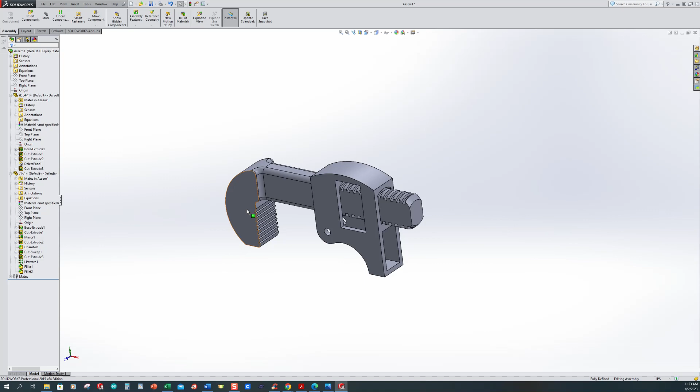So now we're going to say advanced mates. This is going to be a little bit different than what we've done before. So advanced mates, I want a distance mate. Now I'm going to pick this face and this face. So it now says that these two are 1 inch apart. The maximum I'm going to want those two apart is maybe 2, and the minimum I want them apart is maybe 0.125. Okay, I'll accept it and accept it again, and now I'll verify that it's really what I'm looking for. So that's the distance that this thing will rotate or move.

Looks like it's going to go in a little bit too far, but we can fix that later on, so we're not real worried about that at the moment. Okay, so the next thing we're going to want to do is put our adjustment screw in here. Now I think that was part 2 - it is part 2. So let's insert a component, pick part 2, and I'm just going to place it out here somewhere. Alright, let's select mate again. I'm going to force concentric, pick the outside of our drive nut and one of those outer threads, and accept it.

Now we're going to also go to another advanced mate because I want this thing centered up in here. Alright, so I'm going to drag it out, and we want to come down to advanced mates again.

This time we're going to want symmetric. I'm going to minimize J1 and expand out J2. Notice these two are like some seafoam type green, so that means those two are associated right now.

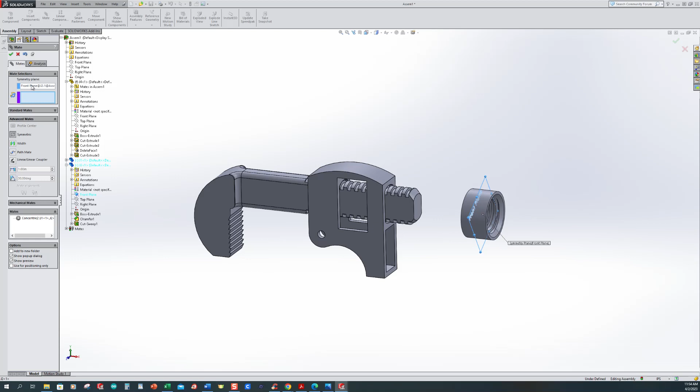Now with J2, I want to hover over the planes and use my front plane as my symmetry plane. Now it asks me what I want it symmetric about. I really want it always in the middle of this opening here, so the two faces that I want that plane symmetric with is this face, and I rotate this around and want this face as well. So that adjustment wheel is now located in there. I'm going to go ahead and accept it.

So the mates that I have is one's going to be concentric and one's going to be symmetric. Another thing I want to do is create a mechanical mate with this. I'm going to select mechanical mate, pick screw, distance and revolutions, let's just say 1, and now pick our 2 parts. I want to pick this piece and this piece here, and it rotates around that way. I'm not real concerned if it's right or wrong, I just want to accept everything I've got. We can always come back and fix those, we just want to make sure things work.

So when you rotate this adjustment screw, everything moves back and forth. Control 7, so now we've got this much going. We want to go ahead and save our assembly, so just hit your save button.

So rebuild. I'm going to call it J1 wrench. Don't care what you call it, just now's the time to name it what you need to.

Okay, so we want to insert a component. We've had part 4, part 1, part 2, so let's look at part 3, and that's what we have out here.

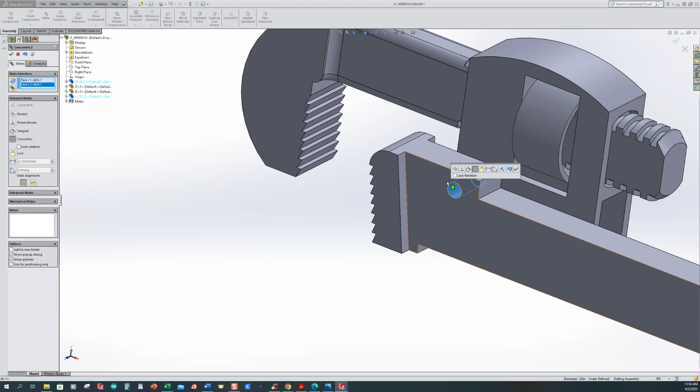Let's create a mate. So we placed it out here in the graphics area, notice it says it's not fixed or anything, and this one's got a negative sign. So select a mate, I want to pick the center of this hole here and the center of this hole. We accept that, now notice it's centered up in here, so it'll rotate around and move in and out, which is kind of what we're looking for. It also shows the 2 that they're associated with.

Now these are the 2 I want to expand out. I'm going to expand this out and use my front plane on part 4, and expand part 3 out and use the front plane on it as well. So now it's centered that up in here. I'm going to go ahead and accept that and rotate it around and take a look at it, just keep it to where we can move this thing around like this. So our pipe wrench is beginning to look a little bit more like a pipe wrench. Let's go ahead and accept that.

How many parts do we have? 1, 2, 3, and 4. Alright, so we're ready to start putting in the spring, I think. Yeah, spring is going to be part 5.

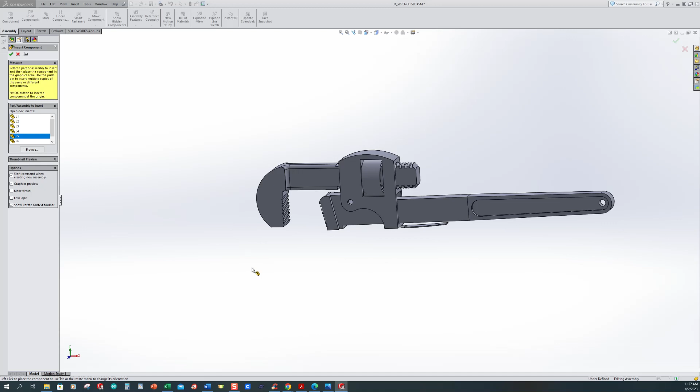So we want to insert a component, drag 5 over here like this. Now I place it down, and if I click on it, it's going to ask me what configuration I want, and remember I've written down assembly, so that's really what I want in here. Now the problem is I brought it in and it's upside down, really not what I want, but we can flip that.

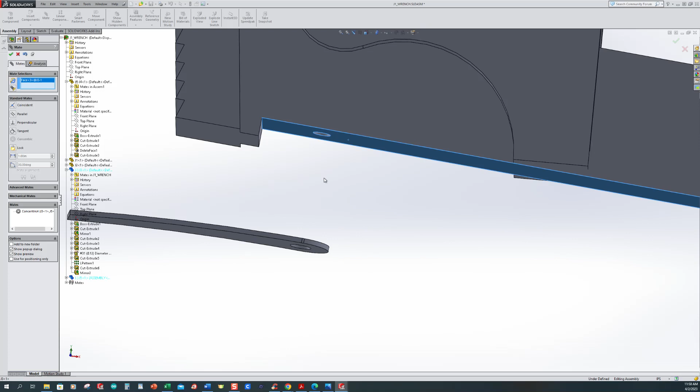So let's come up and select mate. I want the center of this hole and the center of this hole. Now I really wanted it flipped, so right here it says flip mate alignment. I'm going to flip the mate alignment and accept it, and now I can drag this thing around, do whatever I want with it, but I'm not really ready for that yet. So the next thing I want to do is pick this face and this face and accept it, now it makes it a lot easier for me to control about moving it around.

Okay, so let's create another mate. I'm going to want this face and this edge. I may have to back up on these and bring this back in, because I've kind of got you backed up into a corner, so let's go ahead and kill these mates. I'm going to go ahead and accept them.

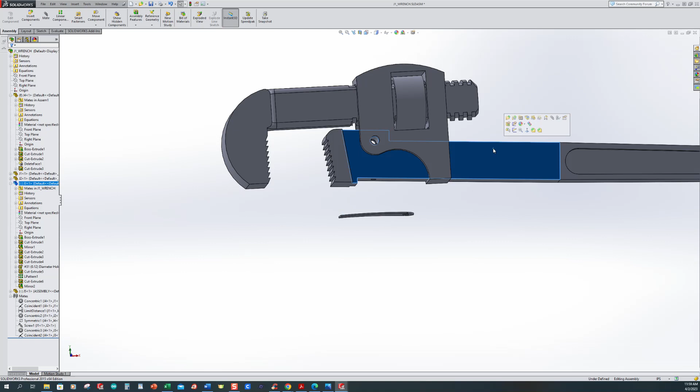Now, if I want to get rid of the mates, these are the last 3 that I did, this is the time to do it. So I'm going to delete that, yes I want to delete it. I'm going to move this around here, okay, and delete this as well. So now I've got it kind of flipped. I'm going to go ahead. So we select mate, I want the center of this and the center of this.

Now I'm going to expand this out, and I'm going to want part 3, I'm going to want the front plane, and then part 5, I'm going to want the front plane. But I'm going to want to flip those so it rotates it around, okay? So accept it. You can't just give up on these things.

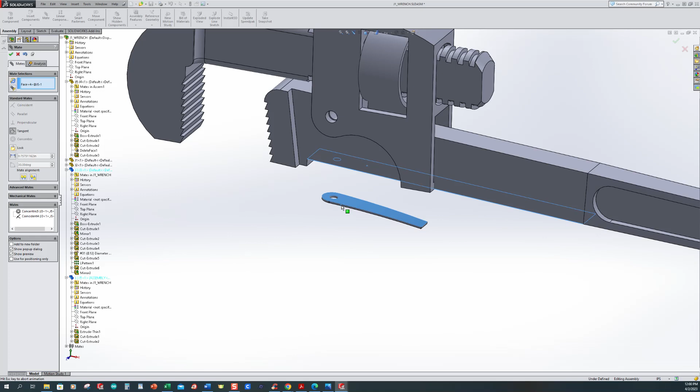The next thing that I want to do is pick this face and then this face. Accept that as well. So now when I rotate this up like that, if I had my spring where it was just as big as it was earlier, it's going to force some things like I don't want them.

Now the next mate that I'm going to want is this edge here and the face of our spring. So we now have that located in there. I'm going to minimize all of these in my tree. Now this is kind of fixed, so I really can't move that thing around anymore, but that's kind of how that spring is going to be in there. So when you're using this pipe wrench, you'd actually press down on it and then figure out what size you're going to need by adjusting your screw in or out.

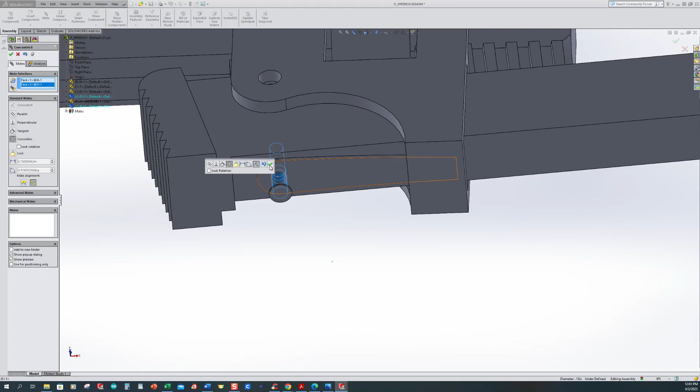And now we're ready to put our 2 pins in here. So let's go ahead and insert a component. J6 is next, and that's that little pin down here. So we want to mate this pin and this hole. Now I want to flip my mate alignment, so that made it a little bit easier. So we go ahead and we also are going to lock our rotation, and we accept that one.

So the next mate that I want is this face and this face here. This face and that face, accept it. And now we got one more pin that we've got to put in here in our assembly to be complete.

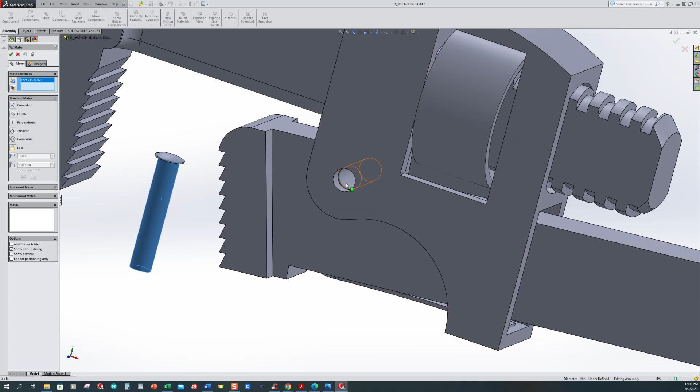So we come up and we say insert component, and I think it was part number 7. So pick it, I'm going to place it here. We're going to select a mate. I want to pick this mate, and I want to pick this, accept it, but my pin is way in the middle of this thing, all the way on the other side. Don't be too concerned, I can just drag it out and then place it.

Alright, so the next thing I want to do is mate this face of my pin and this face here, and accept it as well, and then accept it. Now J7, I forgot to do one thing. So I come and open it up, I look at the mates, I expand it out, and my concentric mate, I want to edit that. What I failed to do was lock the rotation. So lock the rotation, accept it, and now you are fully defined.

So Control S, make sure you save everything. Now the one part about this is you can't move this jaw, right? But our mates that we have in here, this little spring, remember we got all these mates, we don't know which one goes where. I mean, we can hover over and figure out what they are.

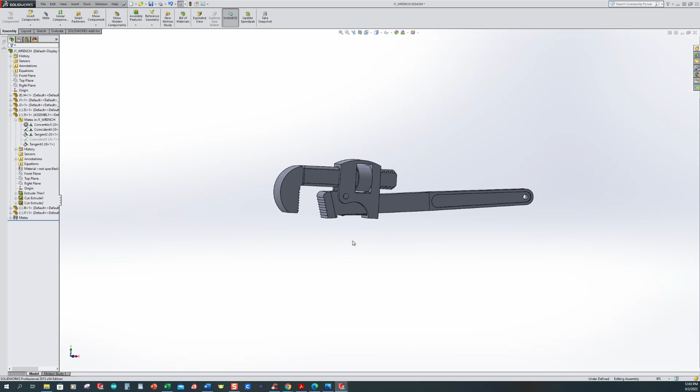So I'm going to minimize this, but I know that this part, so I pick on this part. J5, I expand it out. Notice there's a neat little folder right here that tells me what mates are associated with it. And see this coincident? I'm going to pick it and I'm going to suppress it. Alright, so when I suppress it, I can actually take this and move this thing around like it would be, like you'd use it in real life. Even though our spring is not exactly what it should be, that's kind of how this thing is going to function. So you can still move these things in and out.

So make sure that you put this thing in an isometric view. Go ahead and save everything out, and this is what you're going to submit to us in the learning management system. I know this was a little bit long and drawn out, but this kind of shows you how you're going to do some bottom-up modeling.